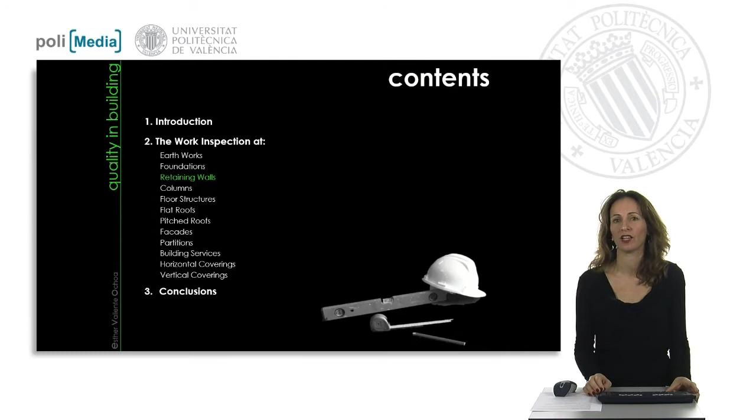I would like to show you the main activities we should check during the construction of this unit. Remember the Deming circle that will help us to get this scope. Plan, do, check, act. Start from the project management, just follow the activities during the work construction and check all these units. In case of any failure or nonconformity, just make the report.

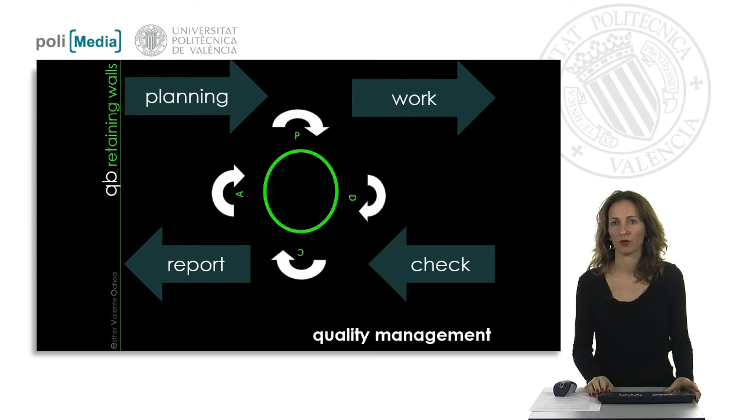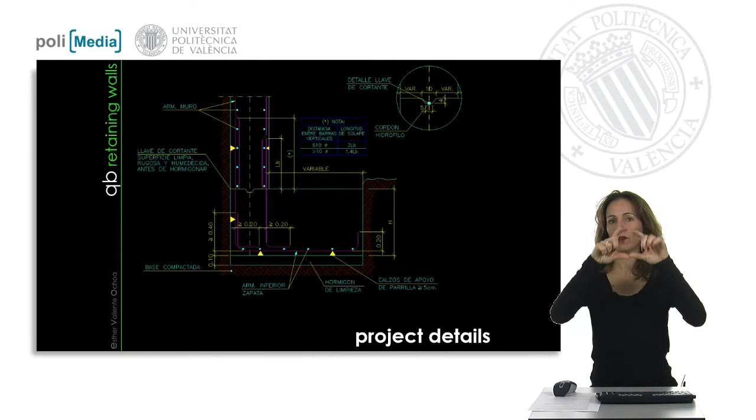In the project details, we will find all the specifications for this construction. We should open our mind and just think about the retaining walls. There are a lot of kinds of these. So we can have one-phase retaining walls, two-phase retaining walls, some retaining walls that are going to be built up from the bottom to the top, and in some cases we are going to combine the excavation with the retaining walls because we have to do the retaining walls from the top as a ring and go to the bottom. We'll see in some pictures.

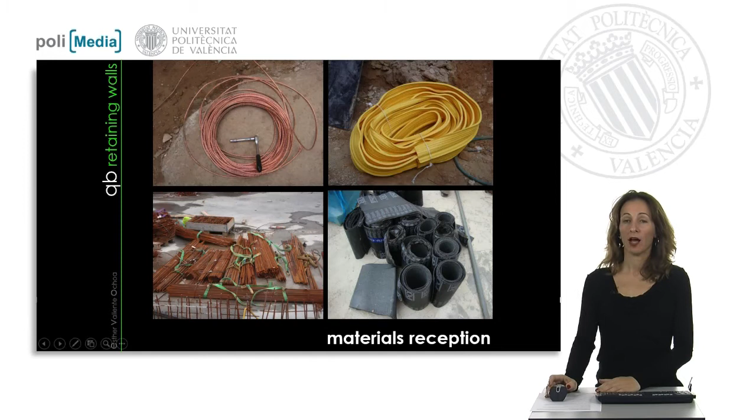During the materials reception, we should also check the specifications that are mandatory from the CE mark or from the new directive for construction products. Please mind also the position of our storage because in some cases it has to be protected from humidity and from any aggressiveness to our materials.

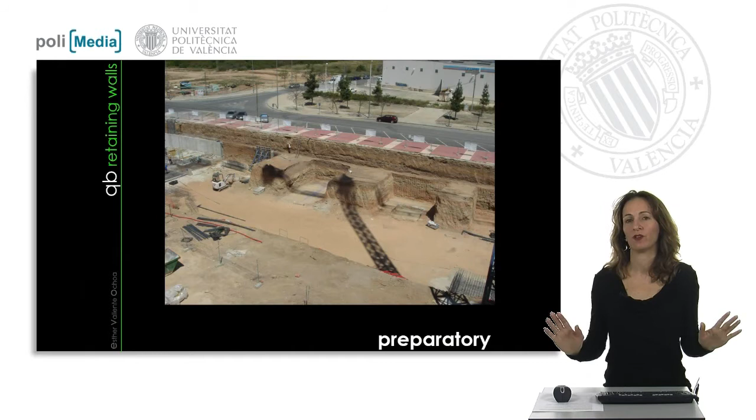The process is something like keeping one on and one off. You keep the land that is holding the pressure of the soil load at the time you make a hole excavation, right? So this hole is just a kind of compensation. You can make the excavation and just replace it with a part of your retaining wall. Excavate and replace, excavate and replace. So finally, the continuity of the load is completely stable, completely safe and well done.

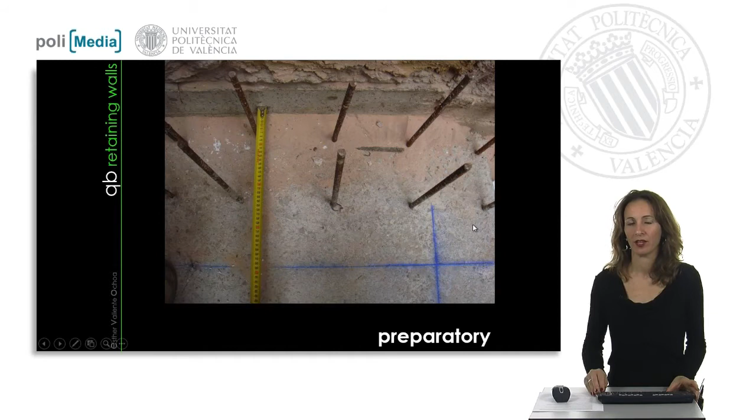During the preparatory work also, we will make the chalk line on the surface where the retaining wall is going to be placed, and we should check the bolt anchors and their length, position, rust, diameter, and so on. In the preparatory work also, we should check what kind of retaining wall we are going to do, because after that we need to think about the reinforcement. In the reinforcement, if we are going to make it from bottom to top, it will go directly from the anchor bolts to the new casing.

But in this case, we are looking at a specific activity. Just put on a plastic sheet and fix the rebars directly to the subsoil. Why? Because we are going to build this ring level of our retaining walls, and then after doing that, we will make the excavation of the inside or underground level.

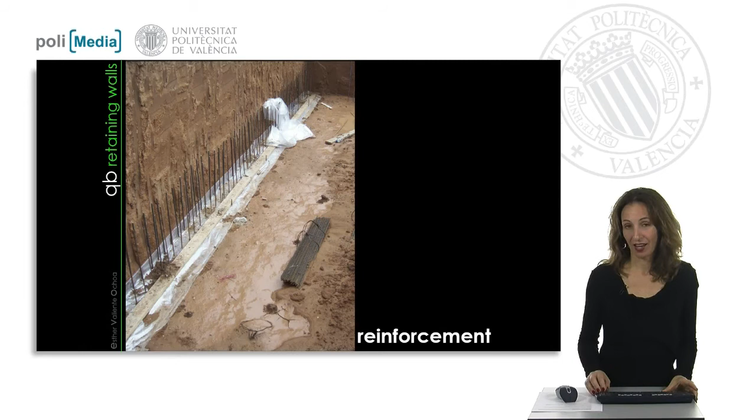The reinforcement, in case we are fixing it from the bottom to top, is very easy. The anchor bolts are waiting and we should tie and splice them with the new rebars, with the new mesh, with the new reinforcement, and fix it in the right position. Just plumb it and take care that everything is as the project is asking of us.

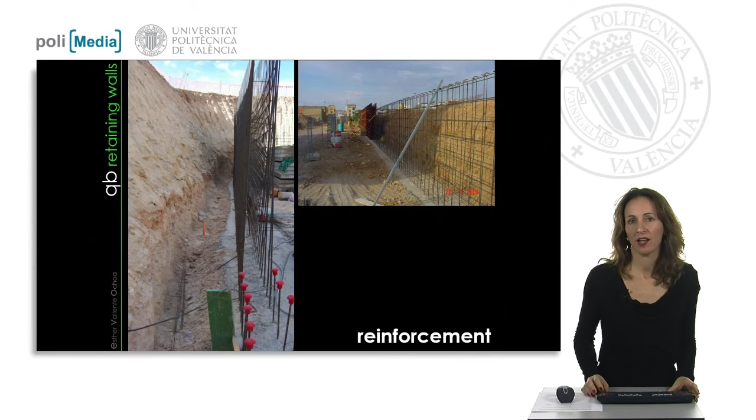In this picture also we are making the reinforcement, but here the rebars are positioned on only one face because on the external face we have the land. So once more, mind the diameter, position, disposition, the ties, the anchors you are going to fix, or how you are going to splice the bars and the rebars, and of course if there is any kind of rust or any damage in our rebars.

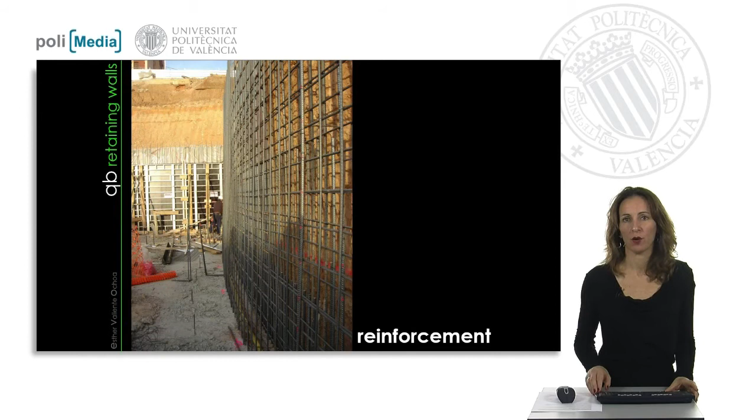When the reinforcement is done, it's time to start with the formwork. The formwork will be fixed and will keep our final shape. So it's very relevant to check it and check the plumb of the formworks. These steel formworks are completely straight and are fixed or fastened together by these strips, right?

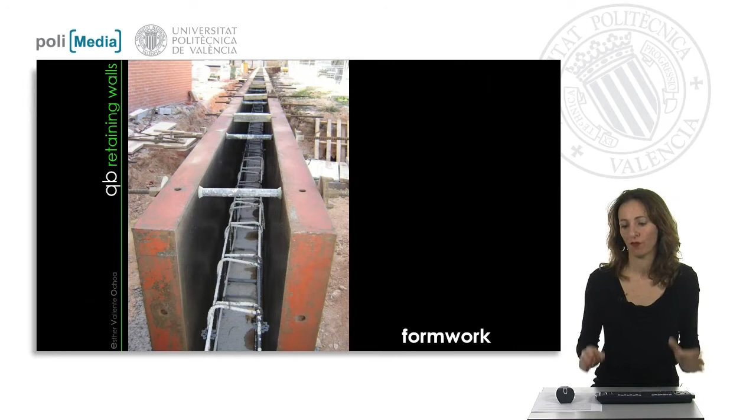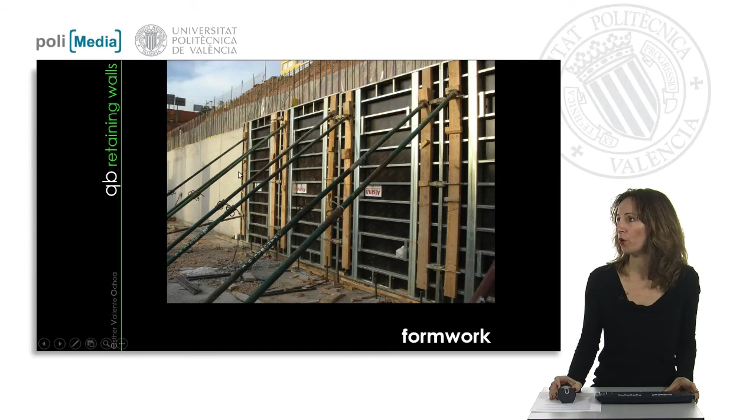So these strips are a kind of sword, a kind of pins that will fix both our formworks. During the formwork, we should fix it very strongly, and we need to be sure that the shape is going to keep continuously in a plumb, straight position, because during the pouring, when we pour in the concrete, there will be pressure and movement, and if it is not well fixed, we will probably have irregularities in the final surface. These are the props that are fixing the formworks and are fixed to our horizontal element.

If everything is done, everything is ready, now it's time to pour in the concrete. But there is once more a difference between pouring in elements that are built from bottom to top and the area that is built from top to bottom. In this picture we can see the first line of our retaining wall. It is completely finished, and we can see here all the anchor bolts that were fixed into the land before starting the excavation. Then we can do the excavation of this unit, only this part, keeping this part of the soil to support the load of the earth, right?

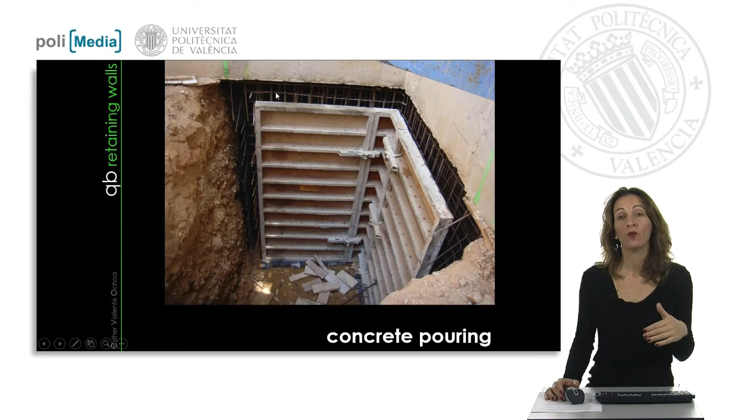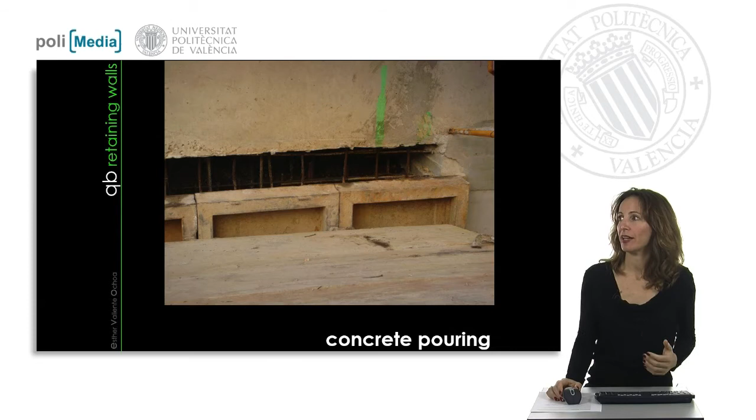Then it's time to put on the reinforcement, all the rebars, fix it, tie it, and then fix the formwork. In the formwork you will see there is a distance, a kind of line, a big longitudinal hole where the concrete is going to be placed. We need this area to pump the concrete, to pour the concrete inside, because if not we have no place to fill it up. Remember, the first is done and now we are doing the second line, right? After pouring, this area will be useful to connect the future floor or the future slab in the intermediate levels.

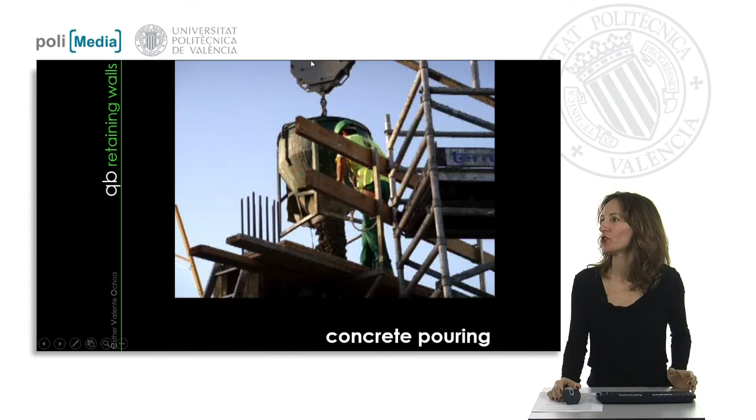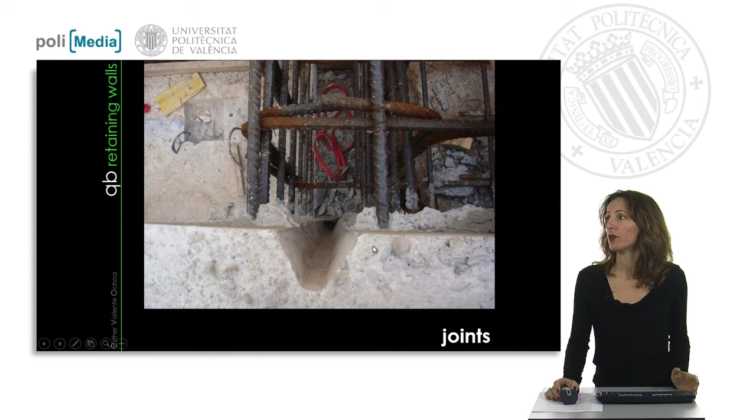When we are pouring the concrete in a vertical element that is built from the bottom to the top, it is very easy. You can use a tremie directly and just pour the concrete inside. Taking care of the joints is another activity we should check during the process. The more irregular the surface is, the better. Also, if necessary, use a waterproof system that will help you keep it very dry in the future, in the life of the building.

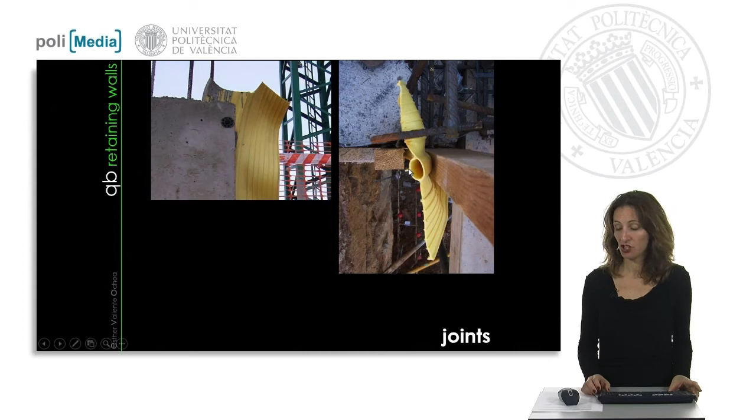The joints could be done with this waterproof sheet. In case you are at an expansion joint, you have to use this special PVC sheet that has the diameter in the middle, and of course the joint can be used vertically or horizontally. In this picture you can also see the waterproof sheet in the vertical unit of the retaining wall, but here in the foundation you can see a very bad joint because it's too dry, and it's going to be very difficult to match the old concrete with the new concrete.

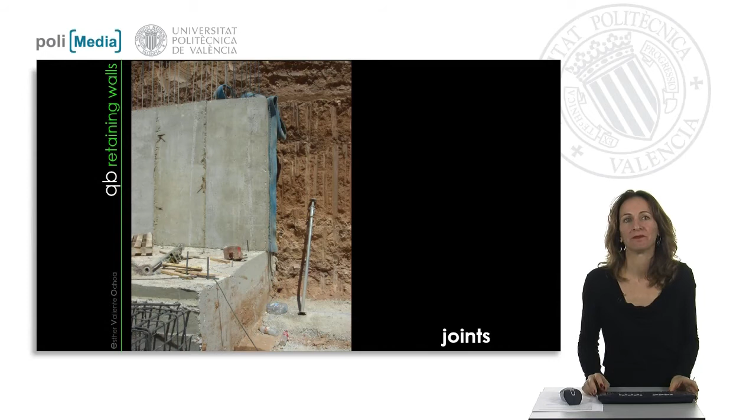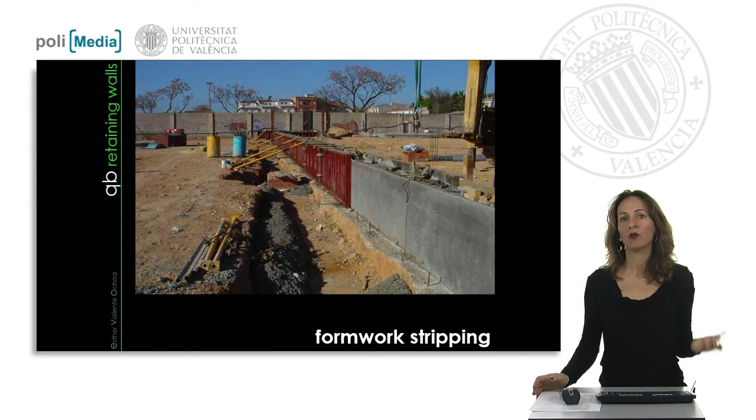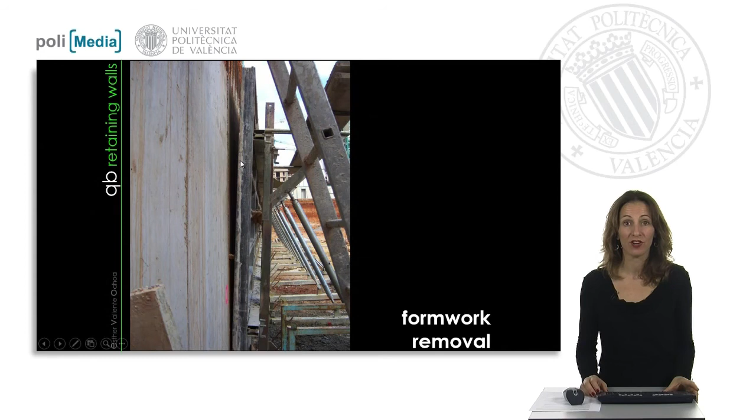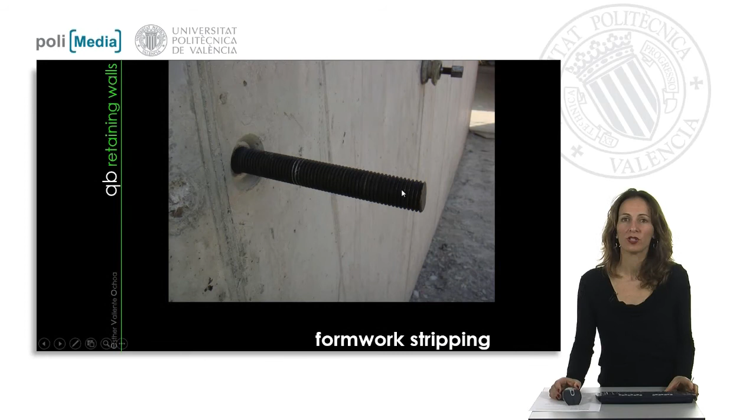When everything is finished and concreted, and the minimum mandatory time depending on the weather conditions has passed, we can strip the formworks. During the stripping we have to be careful with the position, and careful not to damage the concrete surface, and just strip the formwork and take it out to keep the surface of our retaining wall, including all the ties and all the pins we used to fasten both forms.

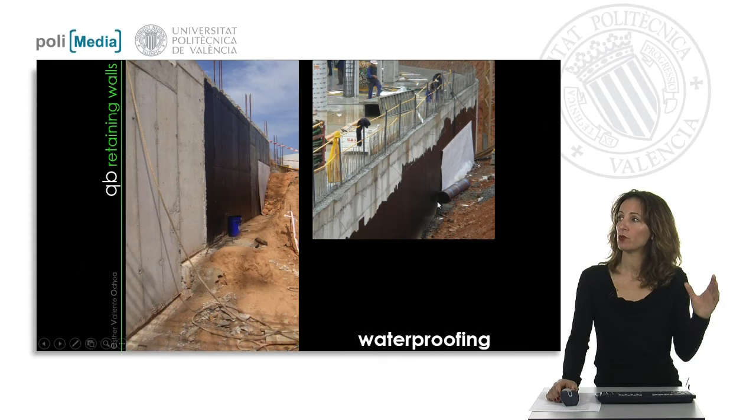And when everything is finished, depending on the characteristics of your retaining wall, it's time to waterproof. If you have two faces and you have space on the outside face of the retaining wall, please do the waterproofing. If not, you can use another system. In this case, you can see the primer on the surface with the bituminous layer, and then you can use a waterproof sheet with the drainage system. If necessary, please fix all the insulation materials and all the sheets that are mandatory in the project.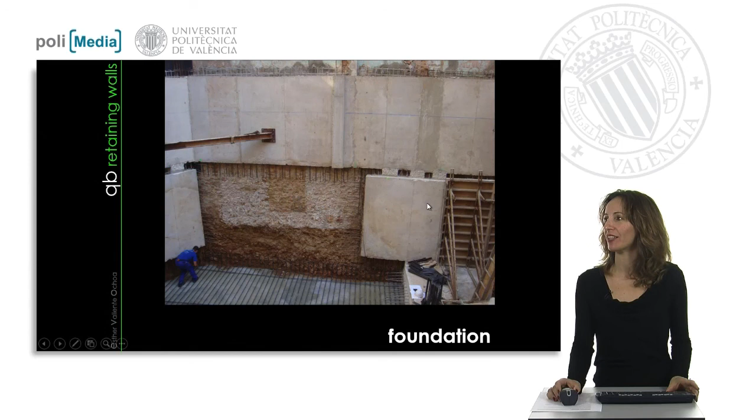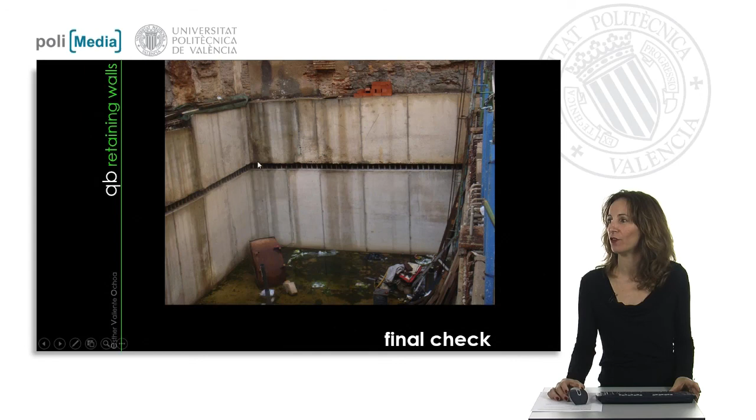Time for the foundation and all the final excavation. Our building should be empty, should be finished, and now in the final check we should take a look at whether all the lines where the pouring was made are well situated for the future slab, for the future floor, whether all the building services are fixed, and whether there is any damage to the cover of our reinforcement.